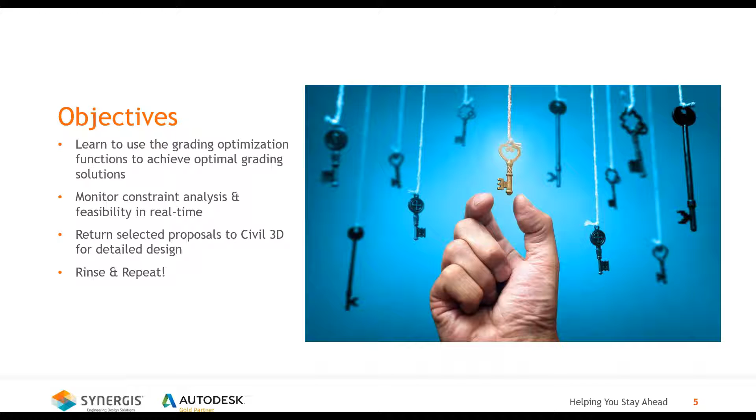So why are we doing this? Why are we creating this tool to speed up grading solutions? So that leads me to our challenges. It's time consuming. It's a manual process for sure. Requires individual thought in each little interaction, whether it's a driveway access, parking lot, detention basin, things we've all done 100 times. But there's only so much that we can automate inside of Civil 3D with our current tool set, which is just feature lines and grading objects, ultimately building a surface.

So when design requirements change, because they will, those revisions sometimes lead to starting over simply because the framework or how we set out initially doesn't really support those design changes. And ultimately what we're trying to do is save money for our client, right? So we've got this great design, but now we've got to bring in 10,000 trucks, and that's not really helpful, right? We're going to try to keep the dirt on site as much as possible and use everything we have at our disposal. So that leads us to questions.

What if you could reduce the time it takes to get that grading solution? What if you could generate options? What if you could use that solution directly in Civil 3D? And ultimately, those solutions can be balanced as a byproduct of the iterations. So what if we could do all those things? So loosely speaking, the answer to those what ifs is something called generative design. The idea is we take some input, feed it to a computer, and the computer outputs options, different solutions.

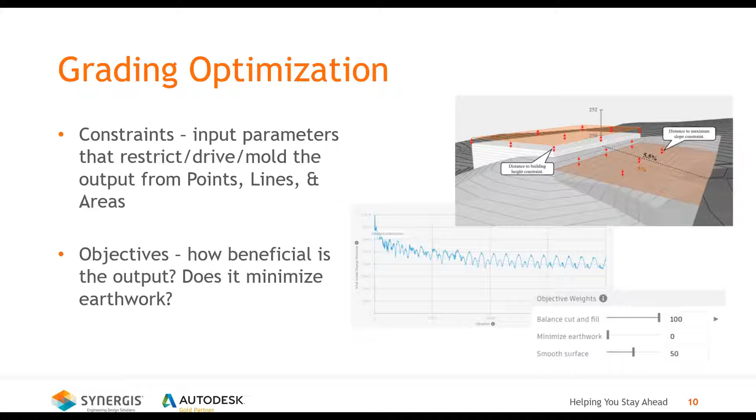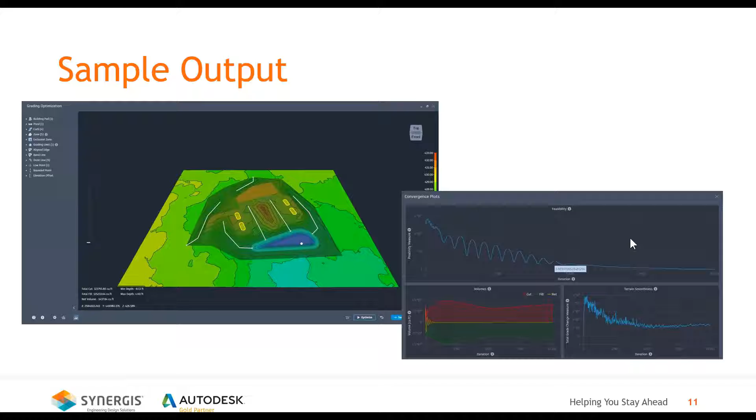Now, in my case, this approaches 0 or 1, right? So that's making it feasible. In other instances, we'll see this oscillate and it won't approach 0, it'll approach some higher number. And in those cases, we've got to adjust some of our input parameters in order to make things more feasible. And then ultimately, we're going to push this back into Civil 3D. That's the easy part. All right, so let's get into it.

So here I have Civil 3D. I've got a surface. I've got a background image just to kind of show where I am. So I've got this field. It's kind of undeveloped. It's used for agriculture right now. So why not put an office building there? That's what we do, right?

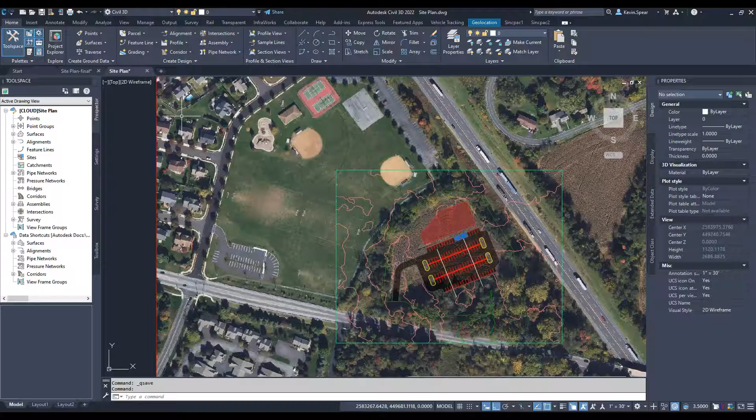A main road here. Lots of stuff going on in the neighborhood. Good spot for an office building, right? If I lived over here, that'd be a great place to have an office, right? I could just walk to it. So simple layout here, probably more parking than I need for a building, right? That's pretty common in standards.

But all I have here to start, I've just got some hatches. I've got a polyline that's closed. Right, I've got some blocks here showing the parking. Just your basic 2D layout, nothing super fancy there. Right, I've got my ADA spaces there in front of the building. Your basic site plan, right?

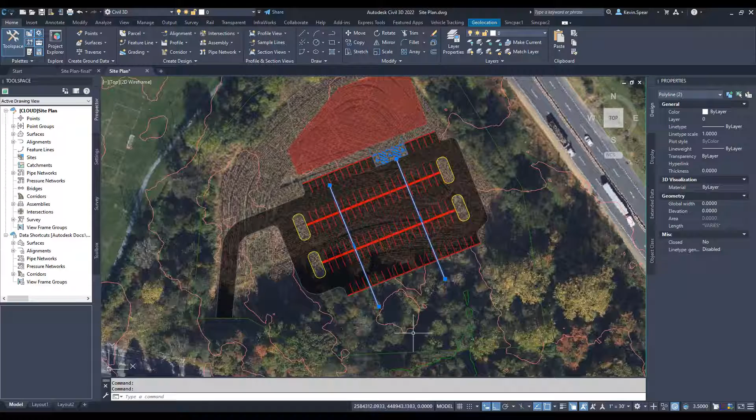The only thing that's probably slightly different than normal is I've got a couple of lines here that represent, I'll call them gutter lines. Basically the swales in the parking lot. I'm going to end up with a basin down here. This is the low part of my site. And I've also got a couple of closed polylines that represent the limit of where I want to grade. I don't want to grade the entire site.

Got some nice trees in here. I might even decide to pull this in if I can make the basin smaller based on whatever my needs are for volume. Right, there's some nice looking trees over there. So I'll start here.

To do the process, first I should mention where the tool is located in the interface. So in the ribbon on the Analyze tab, we have a grading optimization panel. That panel is not there by default when you install Civil 3D. It's actually an add-on.

I wouldn't even call it an add-on. It's an add-on in the sense that Hydraflow Hydrographs is an add-on, or Storm Sewers, right? Those are external programs we just happen to launch from inside of Civil 3D. And these are just simply the buttons to do that process.

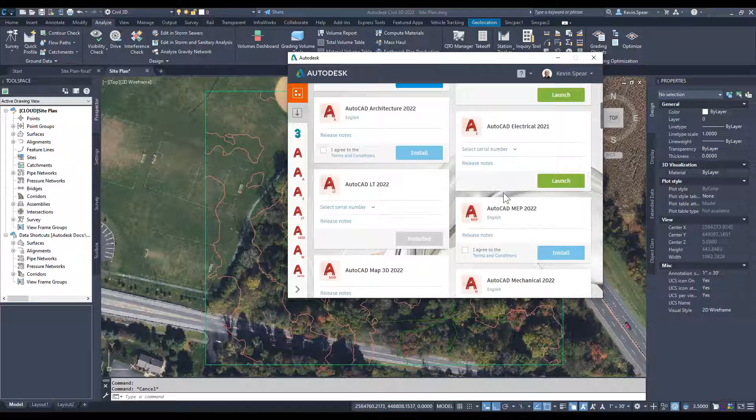So where do we find it? You can find it in your desktop app, right? So I've already got mine installed. So I come here to my products. I scroll down, and one of these will say grading optimization, if I can find it in 2 seconds or less. There it is. Oh, look at that. There's a brand new update. I'll talk about that. Obviously, I don't have time to update it right now. So that's where it will show up.

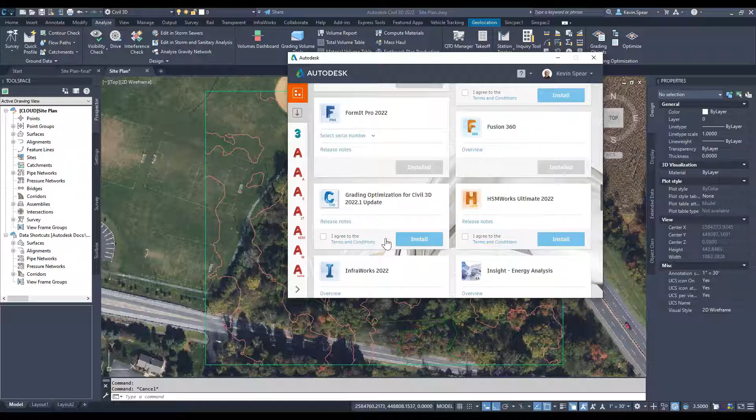If it doesn't show up, there are 2 things that could be the culprit. One, you don't have the AEC collection, right? It's only included with the license of the collection. If you just have Civil 3D, it's not included. The other thing is it has to be entitled like everything else. So your contract or software manager has to go into their Autodesk platform portal and give you access to the software. And then it'll also show up here. Right, so you click I agree and install, and off you go.

All right, so enough of how you get it. Once you've done that, this panel will then show up in the Analyze tab. So the first thing I'm going to do is click this Grading Objects button. What does that do? It opened up a couple of things actually all at once. One is an object browser. So this is very similar to our Toolspace here in Civil 3D, but because these things generally are living outside of the Civil 3D framework, we have our own browser for those objects. So as I create things, zones or drain lines, whatever it is, they'll show up under these different categories. So I'm going to minimize this Toolspace for 2 seconds.

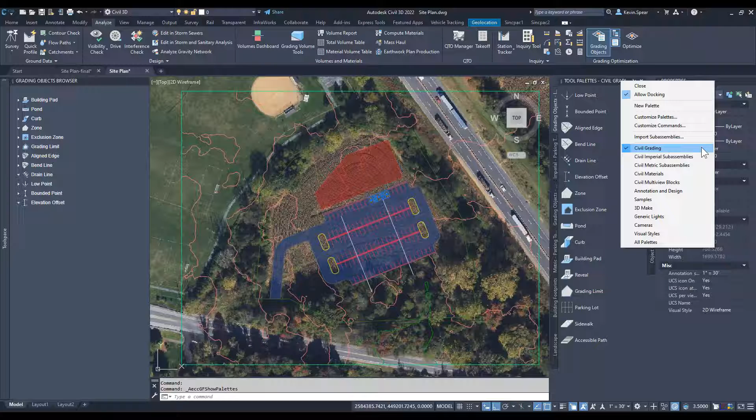The other thing that pops up is our tool palette. Now this tool palette is the standard tool palette, right? I've got all my Civil 3D tools, and I just happen to be looking at the Civil Grading tool palette group, which I'm pretty sure I created myself actually to put all these parking and landscape things in. But if you go to all palettes, then it'll also show up there too. So what's in here? These are specific tools. Now, what are we talking about?

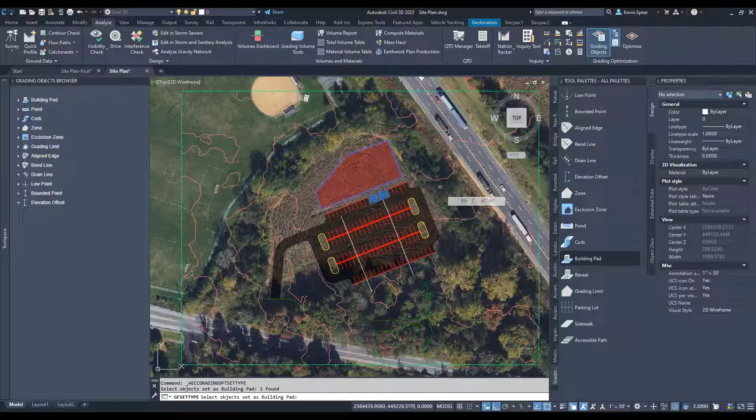So for instance, I've got this building polyline, right? So I've got a tool here to create a building pad. So I pick the tool. It says select the object to set as the building pad. So I'll pick my polyline there and then press enter. And then I get these properties. And you can see why it's helpful to have multiple screens here, right? And we'll call this building 101, whatever, it's a campus, right? You can have multiple buildings.

I can either give it a specific elevation at a fixed value or a range, or I can just say make it level. And as far as earthwork goes, we're on a slab and it's 18 inches thick. And then I've got a color for it. You'll see what that means here in a moment.

So there's my properties, and when I hit escape, it goes away, sort of like Quick Properties does in vanilla AutoCAD. If I select that polyline, even though AutoCAD thinks it's a polyline, the grading toolset now knows it as a building pad. And so you would go through that whole process defining all your things. Now, creating these 2D objects, that's same as always, right?

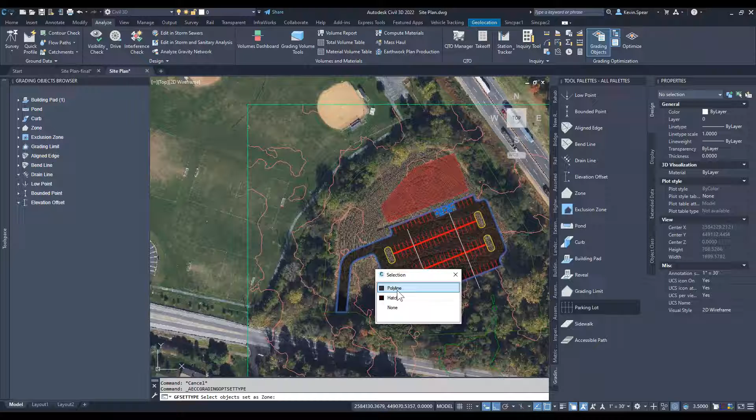So here's my parking lot. So I'll come here to parking lot, pick my closed polyline, and then press enter to finish the selection. And then there's my properties. Now this has got a few more toggles. That's interesting. Let me try that one more time. There it goes.

So we'll just call this parking. Naming conventions are always appropriate. This is a simple site, so it's not super difficult to name things. As far as the properties that go here, we have options here. And then depending on the option, there's an i. So if you don't know what something means, you simply click the i and it'll tell you.

So in this case, I might want to use the custom slope constraint option. So that allows me to manually change restrictions, constraints for a given zone. So in this case, my parking, maybe I'm okay with 8% down to 2%. I don't want anything too flat.

I've got some other options here for orientation and processing information. So I've got exclusive drainage checked here, for instance. That means the zone considers only drain elements that are inside the zone. Anything outside, it ignores. So drain lines, for instance, I'm only looking to shape this zone based on drain lines inside that area.

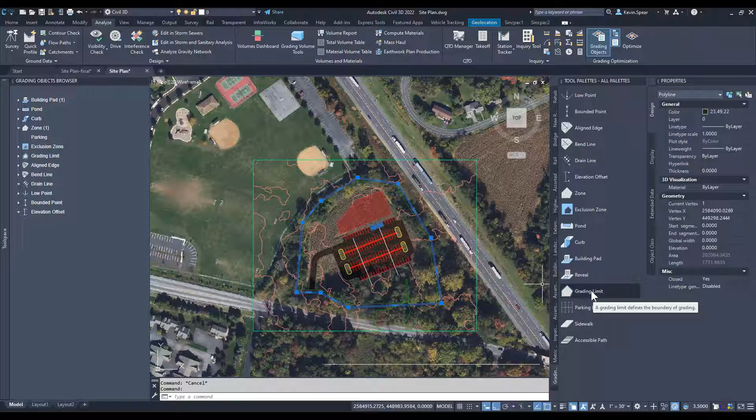The last thing I'll do is I'll use one of my outside lines to create what's called a grading limit. A grading limit is essentially our connection point to the existing grade. So I'll just call it limit. And I could use global constraints here for that. That's fine. And I don't care about aligning the surface or anything else, right? There's no depth of material. But I do want to check on this grading limit.

Now let me move this over for 2 seconds. Let's dock it. That will be better. Notice, of course, my building and my parking overlap the area of my grading limit. So how does it choose what to do? If I told this grading limit to be a certain slope restriction, I think I said 0.5% up to 3 to 1, versus my parking lot, which I generally want 2% to 8%, right, a little flatter.

What wins, and how does that get taken into consideration in these objectives, right? Because if I say minimize earthwork for the whole thing, but I don't for the parking lot, how does it decide who wins? We'll get to that in a moment, but that is important. Let me look at the rest of my properties here. Those are good for right now.

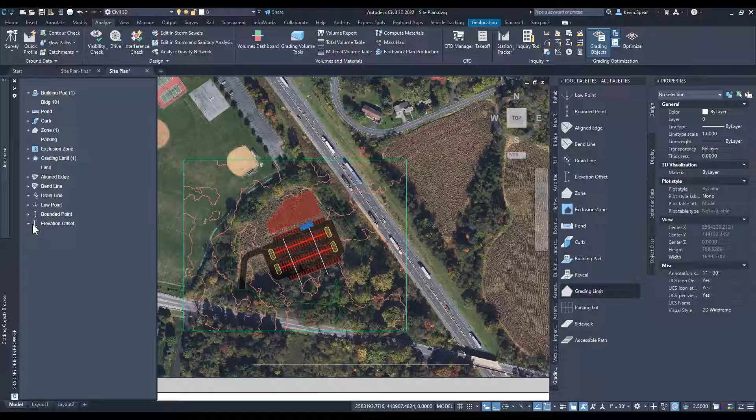And if I look now in my objects browser, I'll see my grading limit, my zone, and my building pad. And I can pick on them here in the browser, and that also brings up the properties. So very similar to what we would do in Toolspace, but it's its own browser. So I've got 3 things in there, nothing super fancy. I didn't even put in the curb islands just yet. We'll just leave them as edge of pavement.

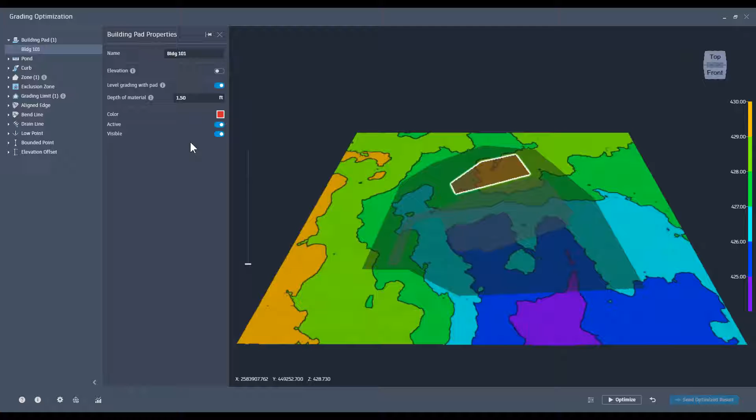So once we've got whatever constraints we want to apply, our last button here is to optimize. It's going to launch a grading optimization viewer. So now it's loading in the terrain and my tools that I established. Notice we have the same browser here for objects. And if I pick on something here, I get the same properties. I can change the properties here or back in Civil 3D, it doesn't matter. It's all the same data. Same thing for my zone, there's my zone properties.

There's a couple of additional tools here. As I hover over something, you'll see I get both a toggle and an eyeball. The toggle means process or not process. And the eyeball is simply just don't show it. So there's choices there for visibility and whether they're processed or not.

If I had additional zones, I can actually drag them up and down to reorder them. It's what we always wished could happen for point groups, right? If I need to order point groups in Civil 3D, I've got to go into the properties and then manually push up and down. Here, all I got to do is drag and drop. So as the site evolves, we'll see more zones, and then I can order them as I see fit. Now, what's the importance of the order? Anyone that's done a composite surface in Civil 3D is distinctly aware that the order is important.

Normally, we would start with a larger surface, and then all of our pieces stack on top of that. And ultimately, it sort of feels like a wedding cake. This is no different in the order of zones. So in the case of my grading limit and my parking lot, I want the parking to win. Now, the grading limit, when something is defined as a grading limit, that's automatically pushed to the bottom of the priority. It's the last thing considered.

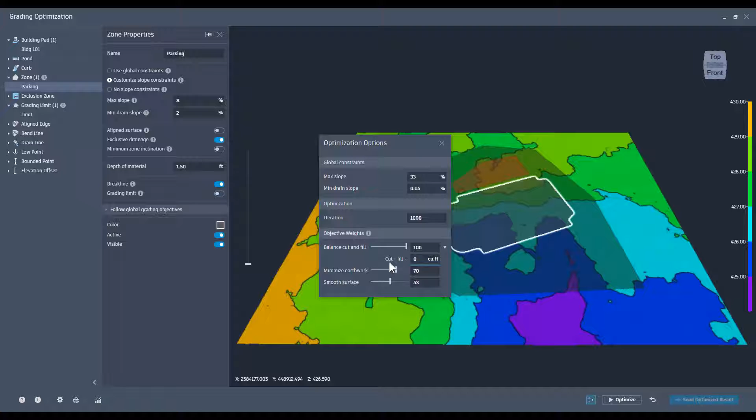If I needed to truck in dirt, I've got dirt from another site, then that would be a negative number. So that's all there is to it. And there's a little equation here to kind of help you remember that. I think Civil 3D grading objects is actually the inverse. It's fill minus cut. So if you want excess cut, it would be a negative number. Anyway, so how do we balance, right? We got a choice there. I'm going to set that back to 0, close this. And let's just go ahead and hit the optimize button.

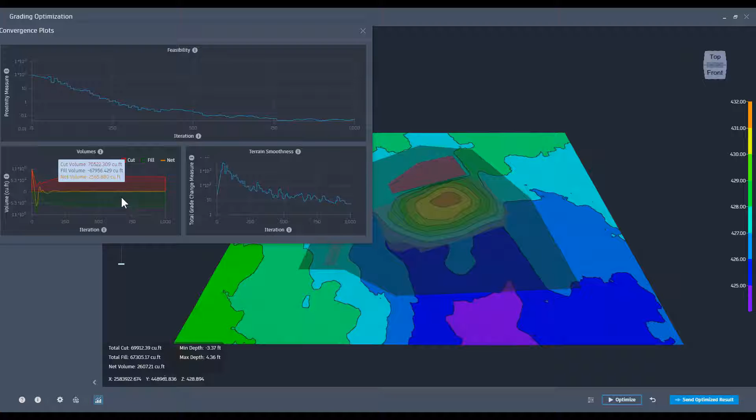We get some feedback here. What's happening? If I look down in this corner, here's those convergence plots that I was discussing, and it's on my other screen. Let me bring it across. So as things are progressing, you can see pretty feasible, but probably not a great solution given the number of iterations that I told it to do. And we can see some of these different plots. And as you hover over them, for a given iteration, I can see where it's approaching. So let's reset that. And let's bump the iteration up to 10,000 and see the difference.

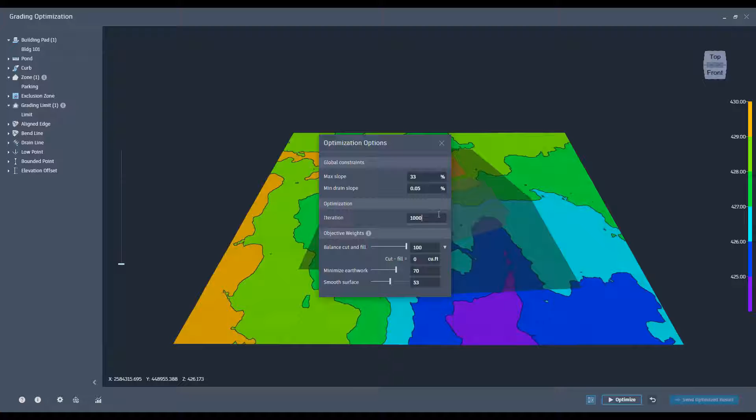Now I've only got, what, 3 items for it to think about. I don't have a basin in there. I don't have curbed islands. No drainage really of anything to really tell it what to do. So it's a very feasible solution, right? There's not a lot of complications to the scenario, but we'll change that, right? All right, so we're already pretty much at 0 at this point, so that's pretty feasible. So I'll just hit stop.

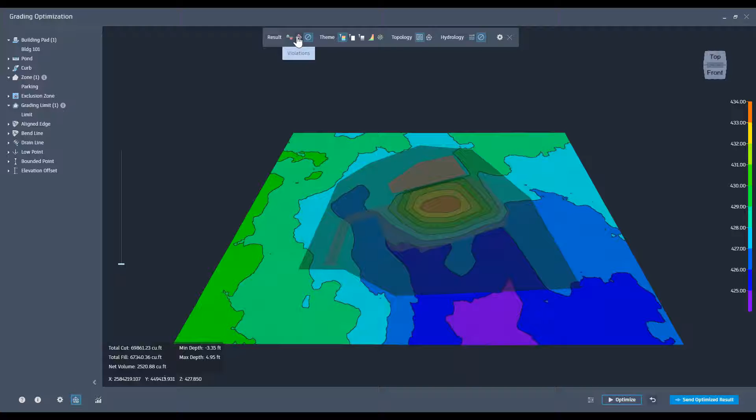And ultimately, what we might want to do is send this result. Oops, send that result right there. But before I do that, let me cover a few other things over here in the lower left corner. There's a visualization toolbar so that as this iteration is happening, you can define different themes. So currently I'm just doing an elevation theme, but maybe I want to see where all the cut and fill is. So basically I'm in a little extra cut at the moment. Right, so most of it's green, the buildings in cut.

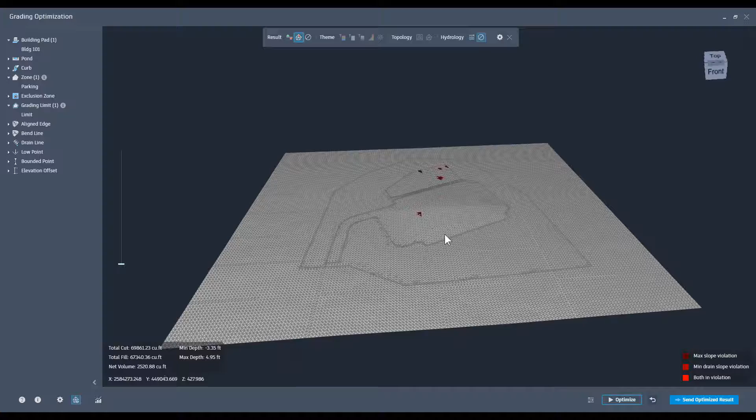I can also look at slope violations, and we're either looking at drainage or max or both. So not too many violations. In the building, we don't care because that's going to be flat, right? That's going to happen. So we have that ability.

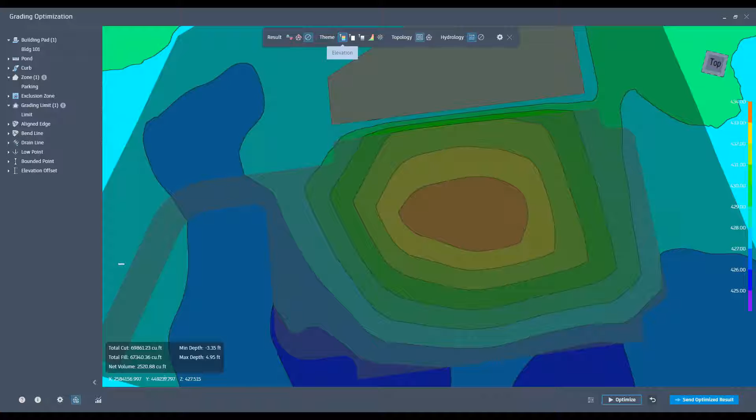The other thing that we can do is I'm currently showing contours, but I could show the mesh that's defining the surface. And I can also show direction vectors. Maybe. But since I don't have, I need something that defines drainage in the grading tool. That is defined by either a low point or a drain line. Those are our 2 primary tools for doing that. Neither of which I have, right? So it doesn't really know what it's trying to do for drainage.

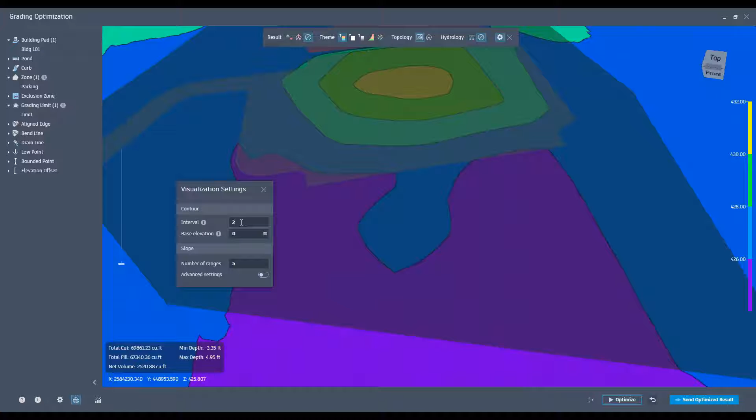The other thing I can do is I can set the interval for, in this case, elevations. So if I wanted half-foot contours, right, I could set that up. That's pretty easy. You know, 2-foot contours, whatever, right? Really easy to do that. And you can set your ranges for slope. So if I switch to the slope view, maybe I just want 2. And then I can define what those ranges are. And nothing super different there than what we would do with the surface in Civil 3D, but it's inside this visualization tool.

All right. So some of our visualization options. We also have preferences. So when we're defining our model, do we want to refine the surface? Well, that's kind of our goal. But if we don't, we can improve feasibility. Mesh quality. So in a conceptual stage, I would set this to low. But if I was trying to do like a final design, maybe medium was preliminary and high was final. But in this conceptual stage, low is fine.

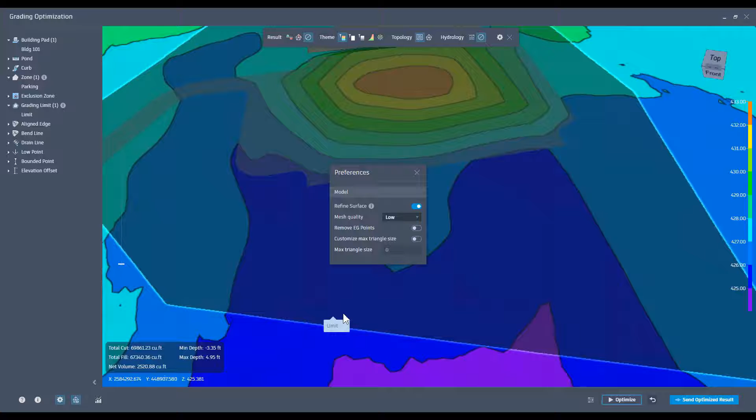Remove EG points and customize max triangle size. I kind of leave those off because inside the grading limit, it's doing its own thing and we don't have that much of an issue necessarily. So we have options, but I haven't seen a need to use them. So that's the interface in a nutshell. Ultimately, if this was our solution, we would hit send result. And we get 3 things that we can send into Civil 3D.

The surface that it built, which could be defined as a new surface in Civil 3D, give it a name and a style, or we could say update an existing surface. We can send feature lines, put them in a site, give them a style. And we can also send points. Now, no points are created because I have no drainage points, right? There's no directional aspect, if you will, to the surface, so it didn't create anything. But you don't have to send something. So you pick a surface, give a surface name, hit finish, and then ultimately that data would be in.

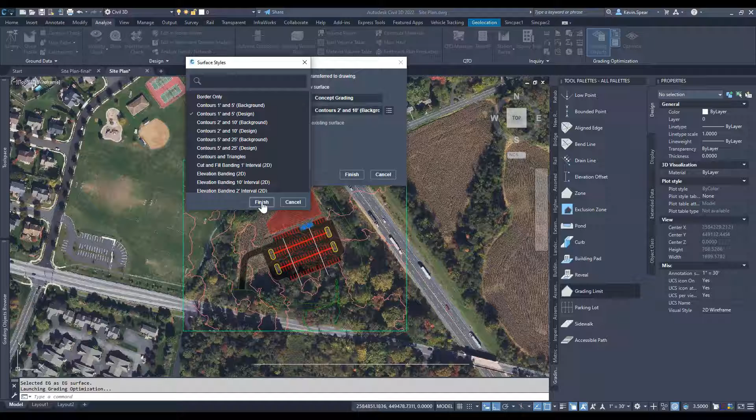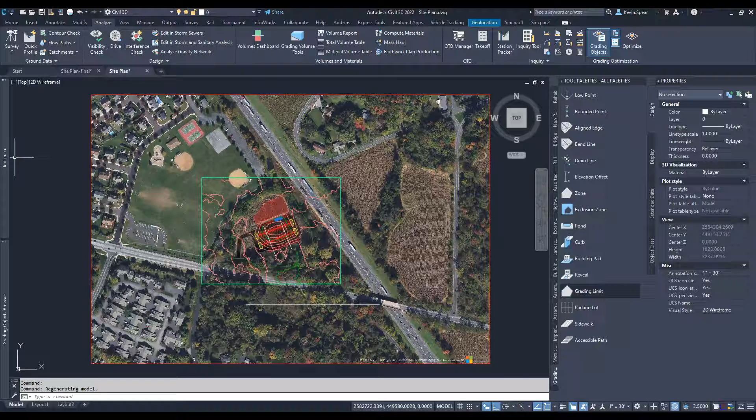So we'll say concept grading complete, with my spelling error. There we go. And we'll pick our style. We'll say 1 and 5 design, and then I'll finish. Now, when it brings in the surface, there are a couple of things. It's everything. So let's go back to our Toolspace and look at our surfaces. There's my concept grading. And actually, for 2 seconds, let me just do the border. Right, so it's literally the whole site. It included both my EG and my proposed surface.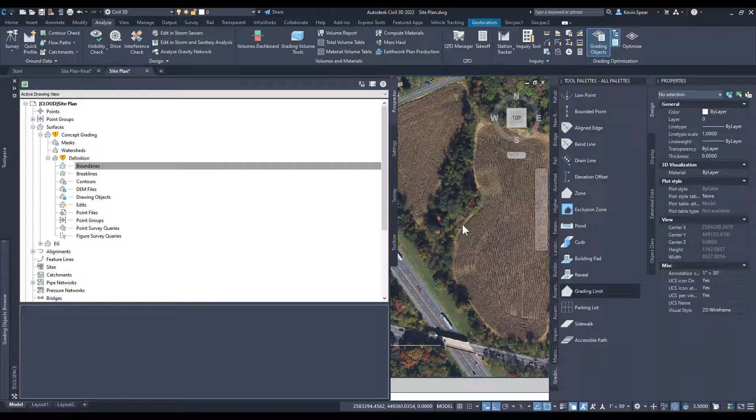So one of the things we typically have to do when we bring in a surface like that is add a boundary. Now, that grading limit can also be used as a boundary. So I'll simply add that. We'll say outer, and this will be outer, and we'll make it non-destructive, why not? And we're looking for, I think I used that one. Now my surface is there. And let's set the style to 1 and 5 design. And there's my design.

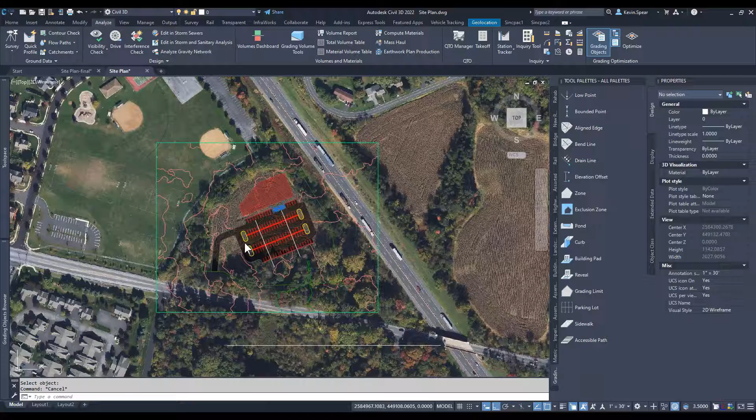Now, okay, so now I've got to add some curb, right? So here, let's just kind of further refine this a little bit. So we'll say this is a curb. Now, a curb can either be a closed polyline, or maybe this was all a line, right? Just the outer edge. I could do that as a curb, but I'm just going to do that piece, these 4 islands.

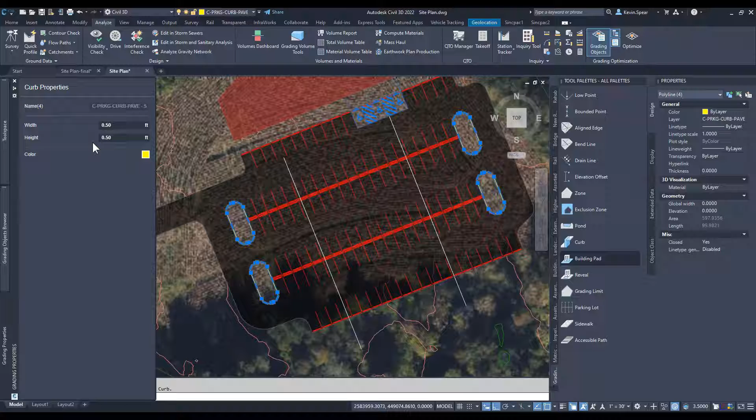Now this is your standard curb. It's not laid back or anything like that. Again, we're just trying to do basic grading design here. And also this is version 1. Ultimately, we'll have multiple shapes here soon. All right, so there's my curb. I got some new information.

Let's go back to the optimize. Select EG surface. Yep, I just use EG as my background again. Now, the reason it prompted me there is I now have 2 surfaces in my Civil 3D file. Before I only had 1, so it was obvious. So now I've got my 4 curbs. Right, let's go ahead and click optimize. Right, that's going to add a little more depth.

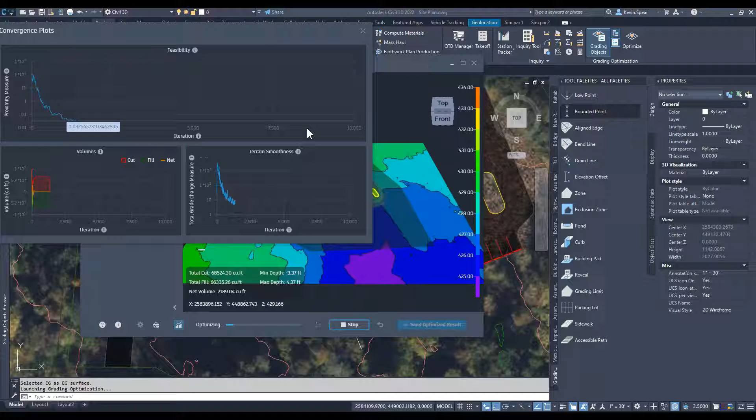And if we look at our plots, right, again, similar output, except we'll have curbed islands there. Well, let's just run for another few seconds or so. Man, that's going to 0 in a hurry. So a few things to impact. All right, so I'm just going to hit stop there. And there's my, we'll just assume that's a solution.

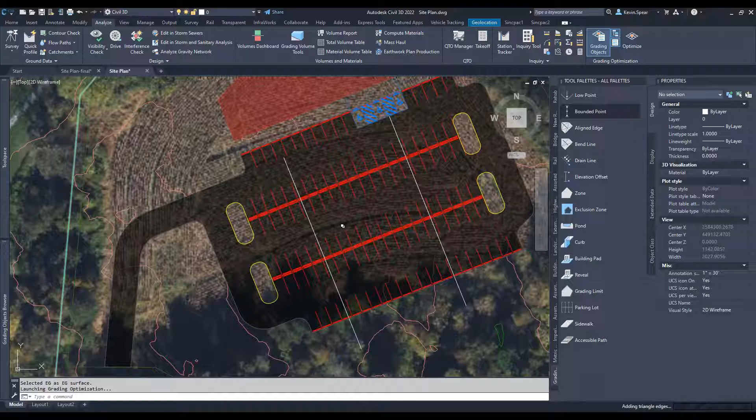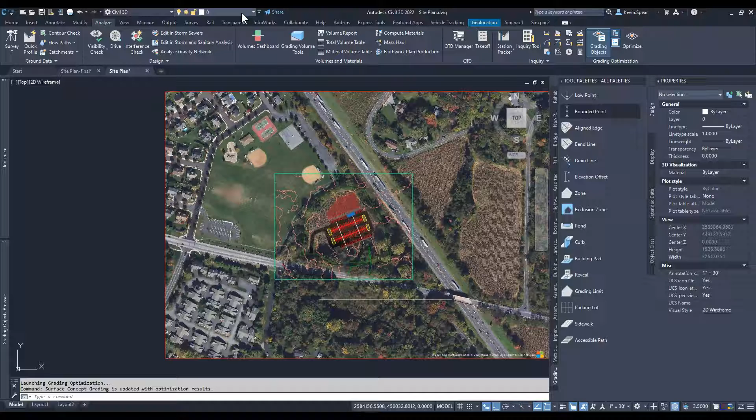Right, so I've made a revision. So for my surface, I'm not going to bring in my feature lines, but I do want to update an existing surface, concept grading, that's fine. We'll hit finish. And now that surface reflects those new changes. I thought I set the style. Oh, you know what? Here, let's freeze my image. It's a little tough to see. There we go.

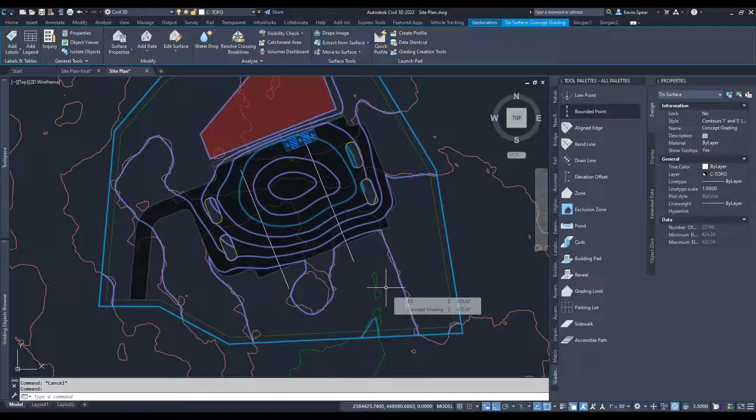So there is my surface right there. Kind of following the existing ground outside of my parking lot. I'd like to actually grade that a little better, of course. So that's where this additional polyline can come into play. My drain lines. So let me add a drain line. One thing to note about a drain line, when we create them, we have to draw them downstream, so high point to low point. So I've got a couple here. I'll draw one in a second.

So that would be drain line. I simply pick the object. It already knows the direction. I look at the properties. There's nothing but a name, that's pretty straightforward, and a color. So we'll do the same thing for the other side. Offset drain line. Pick the drain line. There we go. Now it's a drain line.

All right, so how do I create a drain line? Polyline, line. And let's say I wanted to make sure this area got to my basin down here. So I'm simply gonna turn off my ortho. And let's turn off the OSNAP too. So generally, you know, how I want to get water to the basin, wherever that basin might be. You know, something like that, right?

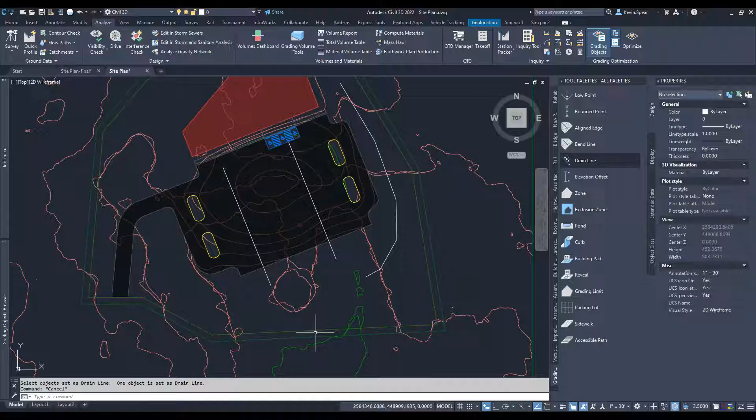Now when I create a drain line, I simply pick that polyline, and because I started at the north end and drew south, right, that's the direction of flow, I now have a drain line in that direction. That's as hard as it is. So this is all 2D stuff that we're starting with. Same thing, let's do the ADA stuff, right? So I just got a simple polyline around that.

So in that case, I would do accessible path. I can pick that polyline, and now I've got properties for that zone. So I might call this ADA parking, right? What's my max and min slope? Maybe I could go 0.5 if I was, you know, willing to do that.

Break lines, you know, do I care about balanced cut and fill? Not really. Do I care about moving dirt or not? Not really. But I do care about it being smooth. Okay, fine, fair enough. That's our ADA parking. So that's the process for all the different bits and pieces, whether it's a building pad, a reveal, a pond, right? They're all pretty much that same idea.

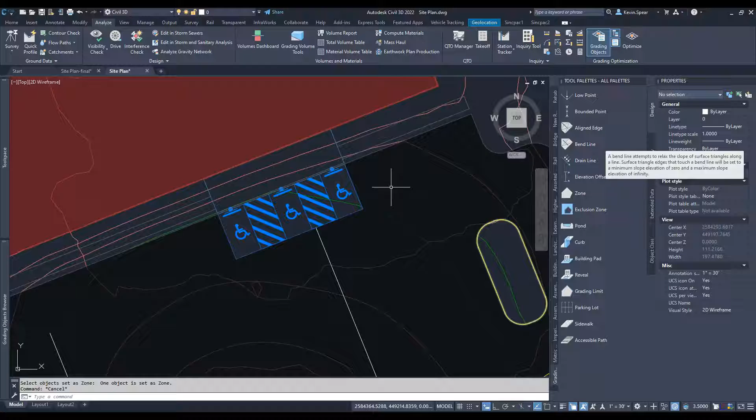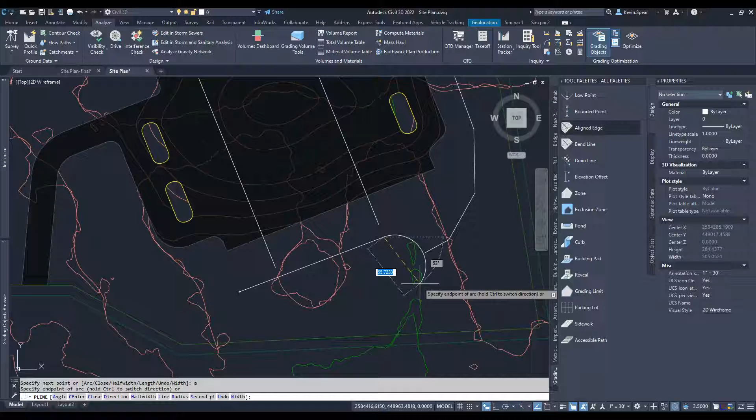Now, the one thing that needs something else besides a polyline is a low point grading object. This requires a COGO point. So let's fake in a basin for 2 seconds. So maybe something like this. We'll say a flat edge for most of it. Throw in an arc. Now let's be a little landscapey. And then we'll close it. Perfect. Exactly what I was thinking for basin, right?

So how do we create COGO points? Manual. And I'm just going to pick a point in the basin, and we'll call this low point. Doesn't need an elevation, so that's fine. There it is. Pretty straightforward COGO point.

Now when I get to my grading object, low point, select objects as low point. So I pick my COGO point. And look at my properties. Again, it's just a name, and off we go. That's my piece. So let's take a look and see what happens now. So we'll go back to Analyze, Optimize. Again, I need to know what's my parent base surface, EG. That's fine. And we'll hit Optimize.

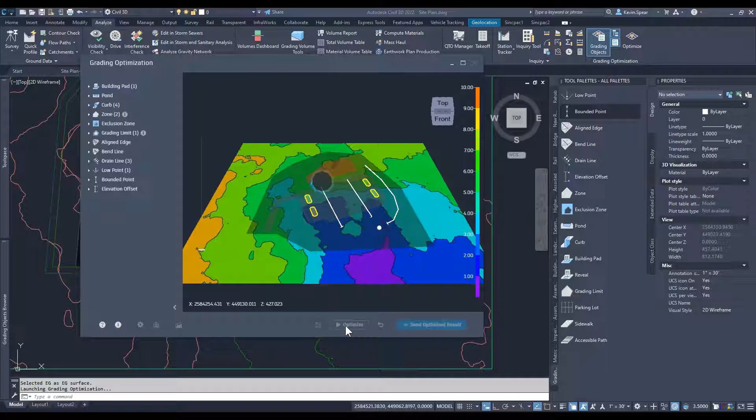So I've got a little bit more for it to think about. Let's take a look at our convergence. Again, not too bad because we don't have a whole lot driving stuff. That looks pretty good. But it is flattening out above 1. Oh, there we go. Got a nice little dip again. So it may take a few moments for it to figure out a solution.

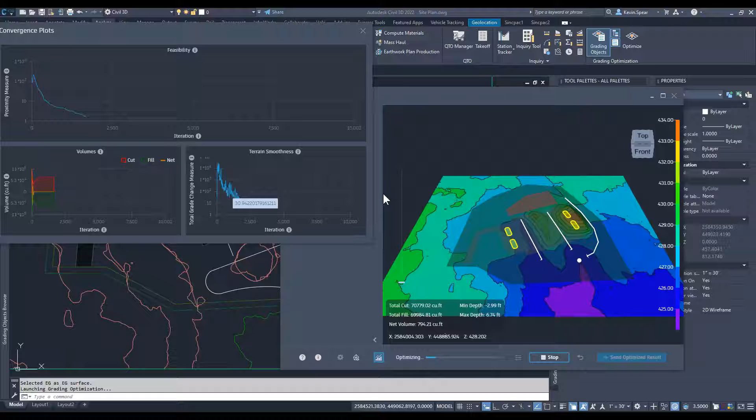Now, ultimately, if it does flatten out, we just need to change our constraints. Okay, so I'm just going to stop it there. And of course, ultimately, we would update our surface. Now, let me move forward in time a little bit. I've added a few more bits to the puzzle. So I've added a pond. Right, so I've got pond properties. So I can define my volume, my depth, basic aspects of a pond.

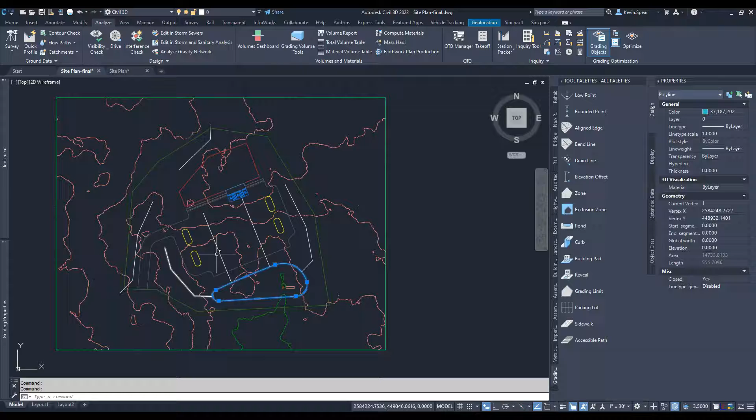I've got a couple more drainage lines here. I did add a sidewalk along the front here. And I did add another accessible path up to the building. I probably could have made it all one, but I wanted to kind of separate it from the parking lot. The other thing too here is I want these to touch or even overlap so that there is some thought of continuity.

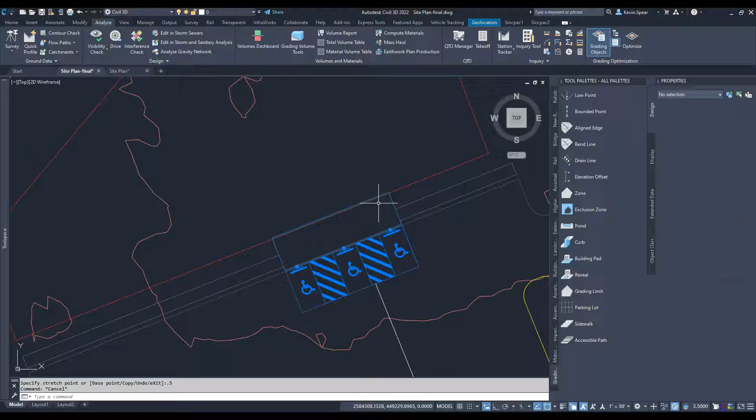So one thing I often like to do in this situation is use my object snap tracking. And so I'll just sit on that point. I wanted to move endpoint. There we go. Now I'm doing an extension of that line. Let's just say it was 0.5 feet into the building. There, so I've got a half a foot overlap. I think I'm good. So let's try that.

I also added, I think I added that as an internal. Oops. Yes, I did. So I've got two there. So let's go to the optimize tool. And let's take a look at some of the ordering now that I've got a bunch of things in here. So a few more things here to calculate, if you will. So I've got 5 zones.

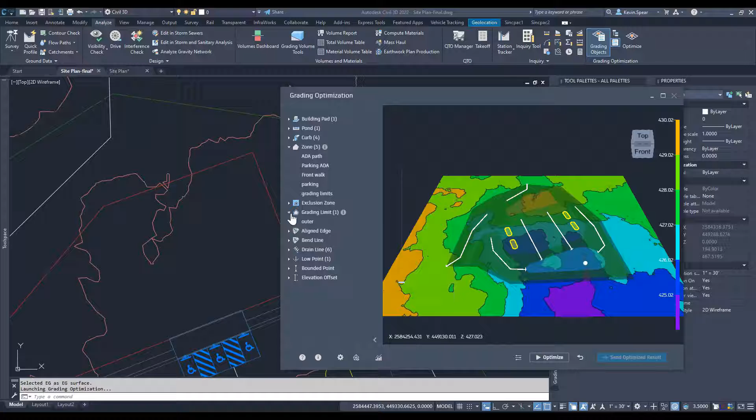So this grading limits is this internal line, right? So I put that at the bottom, then my parking and then the front walk. Things that are adjacent aren't necessarily critical as to sequence, but things that do overlap, we do have a preference. What else? So there's my grading limit, set to outer. Notice everything is turned on and visible. There's my curb. There's my pond and my pad, my drain lines and my low point.

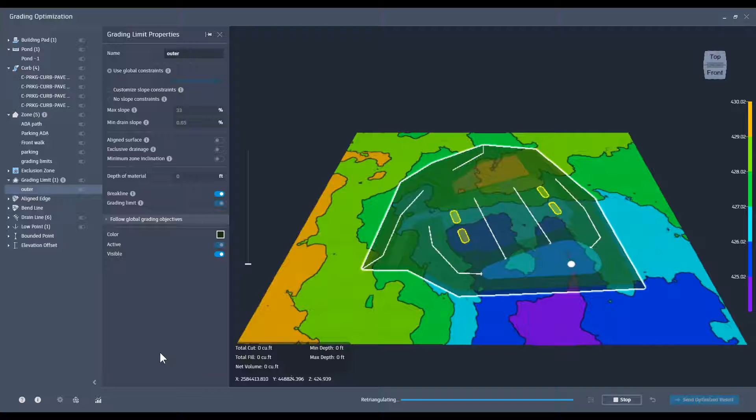So let's take a look, see what happens. We'll go ahead and optimize. And let's take a look at our convergence plots. Now, while this is doing it, how do we navigate? Because you might want to look at this from a different angle. So right now, just clicking and dragging, and that's sort of an orbit, if you will.

If I scroll the wheel, of course, that's zoom. Those are our two main things. If I hold the wheel, I can zoom in and out as well. So that's the same thing as scroll. If I hold shift and left click, that's pan. So our basic tool set, it's very similar to InfraWorks for those that have used that.

Now you can see I've got a little bit of noise there up front. So as it starts to vacillate on some different constraints, it's starting to figure things out here, and the feasibility curve starts to get, shall we say, a little smoother. And of course, it'll go up and down. And it's taking a little longer because there's more things to think about. And I think I put the iterations up at 10,000. There we go.

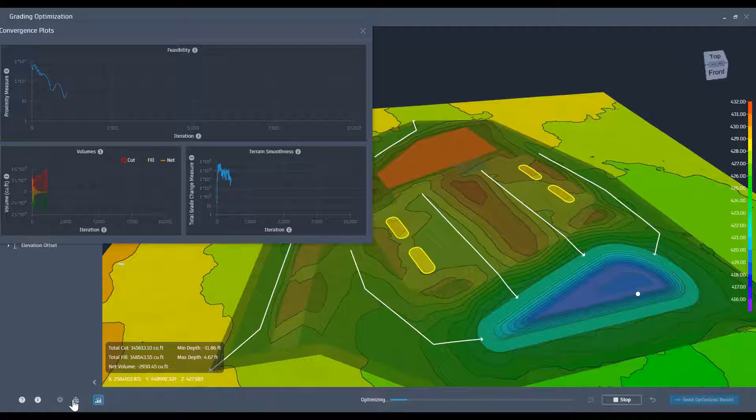So currently I'm at excess cut, which is fine. No, excess fill. Right, so cut minus fill gives me a negative net value. There we go. All right, so a little cleaner there on my convergence. What else can I do? So now that we're looking at this thing in motion, what if I go to the violations?

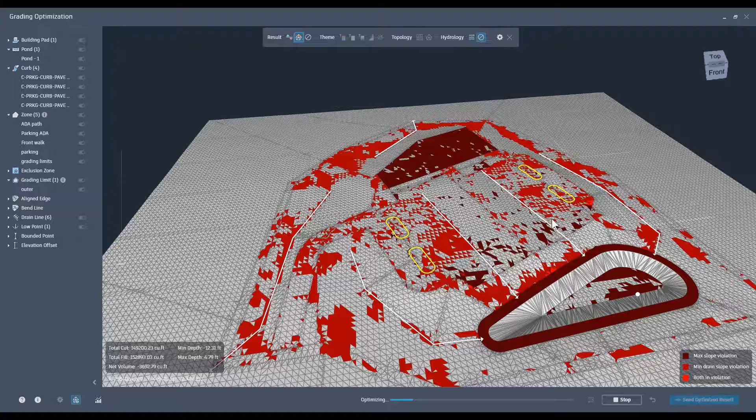So for each TIN face, it's calculating or responding to those constraints. Does this face meet those constraints or not? Right, so we've got different constraints, maximum or minimum. Now, in some areas we may care, some areas we may not.

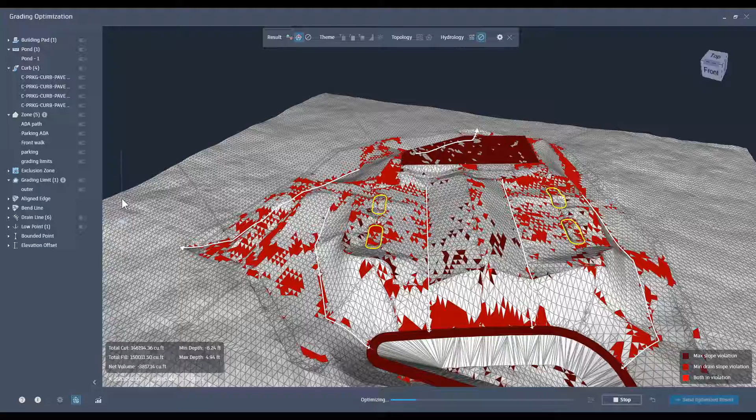There's a slider here to exaggerate what's happening. So if you're in a flat area, right, we can kind of see things a little easier. With no exaggeration, it's kind of tough to see what's going on in this site. But here we can kind of see how things are shaping up. And again, this is early in the process, right?

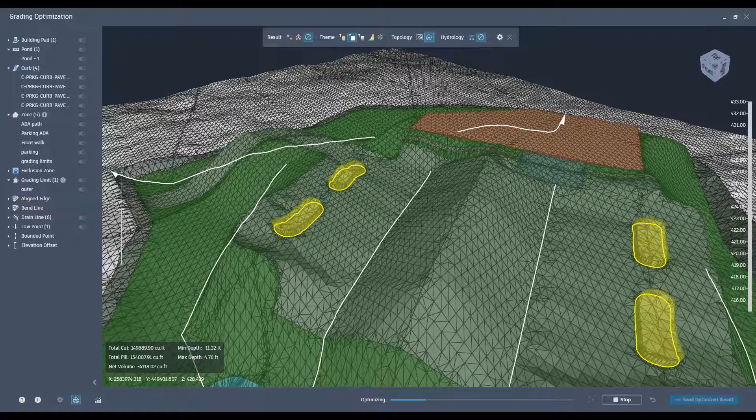There's my pretty little curbed islands. What else can we do here? So let's take a look at our wireframe, right? That's what we were just showing with the violations. What about our hydrology? So now we get to see some of our directional flow, if you will.

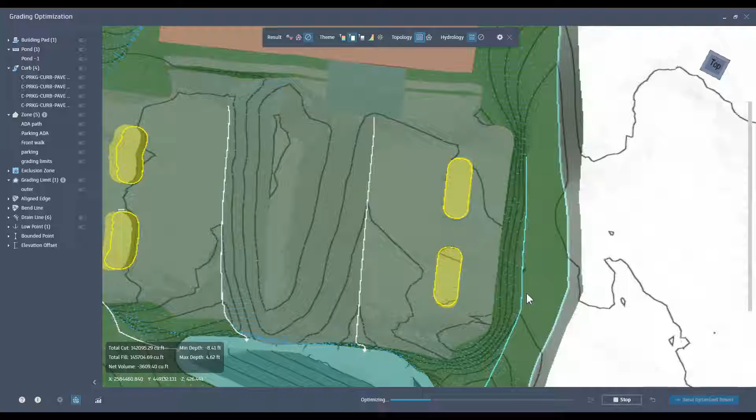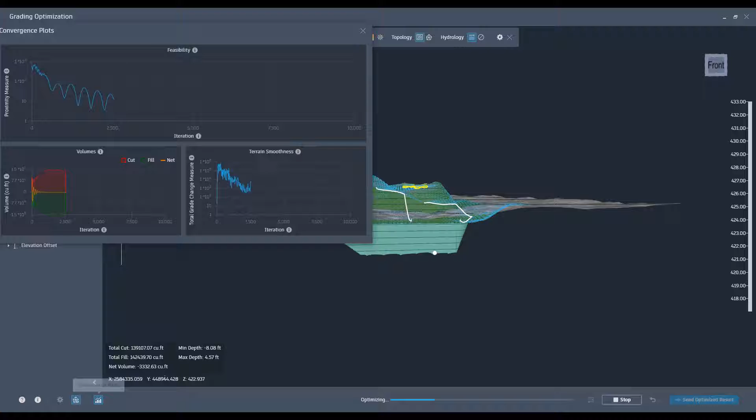It's kind of cool sometimes to take a look at a side view to watch things iterate. So one of the things that happens in the convergence plot is, let's see if I can find a spot to show all this at the same time. There we go. Right, as this oscillates, it becomes more feasible. You may see certain areas go up and certain areas go down and vice versa, right, when we get to the bottom of this. Now, ultimately, because I've run this a few times, it does become feasible. It just takes a little while.

So in lieu of that, let me check my PowerPoint here and see where we're at. So that's where we left off our demo, right? So let's review some of the quick tips while I was processing. Constraints and objectives are two pieces to the puzzle. Constraints win over objectives. We're always trying to meet constraints, sometimes in spite of objectives. So the solver is trying to pick which one wins, so constraints will always win.

Objectives, if we set them to 0, as I mentioned before, basically it just becomes a feasibility study, right? We're not worried about cut and fill or anything else. And ultimately, proximity to 0 in that feasibility graph means that's a feasible solution. If it doesn't approach 0, if it stays at a higher number, then that's probably an unfeasible solution. You saw that I didn't get great results without drain elements, right? So putting drain lines in or low points are going to help us out. Our grading limit is our daylight line, our connection to the EG.

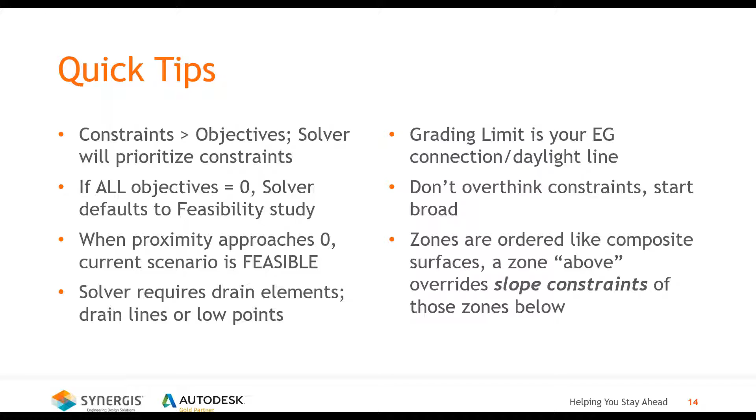so we can give the algorithm somewhere to go. And then ultimately, as you iterate, I think I did 10 iterations in the span of like a half an hour yesterday, playing around with some options. So it's not like it takes a great deal of time. And then the last is when we have zones that overlap, it kind of feels and functions like a composite surface. So we want to order those important zones above ones that are less important so that those slope constraints would then win.

All right, so let me jump over to our questions. I see a few questions here. So the first question I see says, where is the optimizer getting surface data from? That's a good question. So let me jump back into this. So you can see that that's oscillating. Can I switch to Civil 3D? Nope, I cannot. Oh, wait, no, it's not holding it hostage.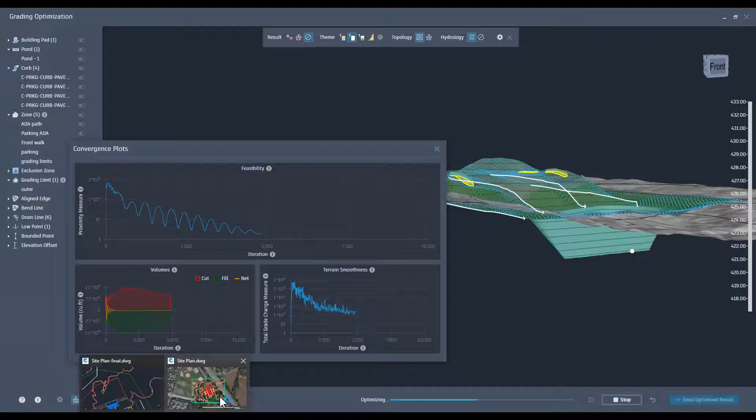So in my site plan final, I have one surface at the moment, just an EG. I didn't actually bring the data back in. So if there's only one surface, that's the surface it's using to start the context for all the different pieces. If I switch to my starting point, in that case I brought in that concept, right? The next time I went into the optimizer, it's like, which one's my base surface? And then that's when I had to tell it to use the EG.

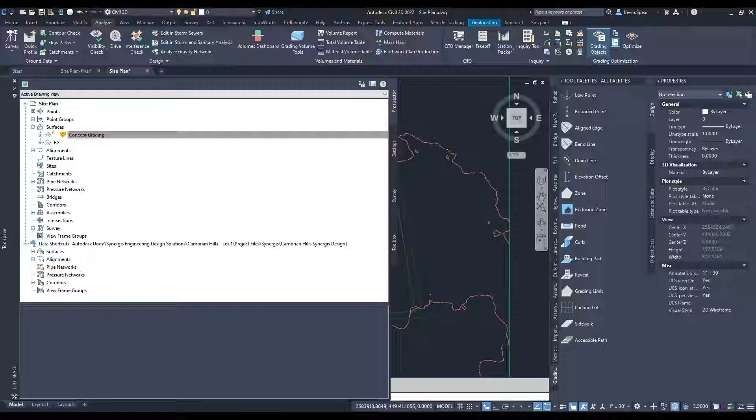It says, can you define the multiple surfaces? So the optimizer is looking for an FG only. Some of the depths and different things that we're giving it in the parameters of the constraints is simply to help the objectives, whether it's cut fill or moving earth or, I forget what the other one was, feasibility, right? Is it possible?

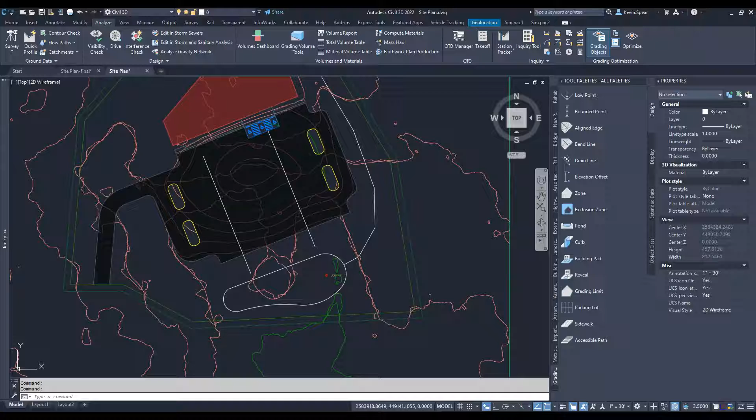Smoothness, right? So we're looking at those objectives. So I can't really get a datum surface out of the parking lot, if that's what you're asking. However, when I do send the results, I can send the feature lines, and then I can build a datum surface out of those feature lines and do it that way. But the optimizer itself only builds the final grade.

So those two questions were from Brian. Oh, and this third one is also from Brian. His question is, do we need advanced hardware to complete these iterations, or will the typical CAD workstation manage this? So that's a great question.

My computer at the moment is 5 years old. It is a Dell Precision laptop. It's kind of middle of the road then, and I would say it's pretty standard spec for Civil 3D. So I've got 32 gigs of RAM. I've got an SSD hard drive. And I've got a secondary hard drive, but it's just for data. Actually, this data is, that's a different process, I guess. It's working off my internal SSD drive. So that could be impacting.

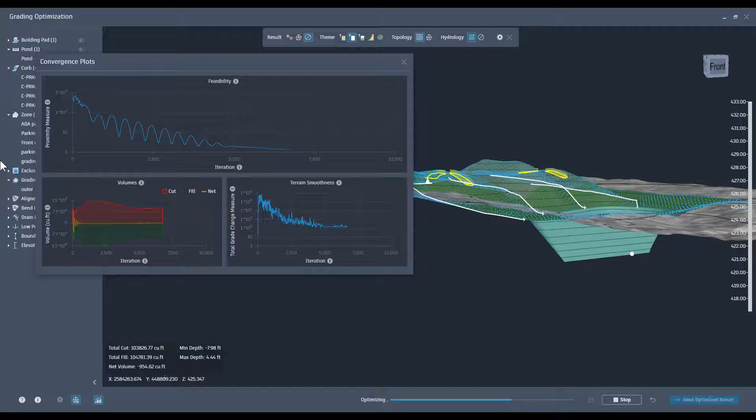But the process, that's actually a good question here. Let's take a look at our task manager, right? What the heck is happening in our performance? So the CPU is going to go crazy there, right? That's expected, but nothing that it can't handle. Memory, that's pretty standard too. It's not really peaking out. That seems fine. It doesn't seem to be hitting either hard drive. So from a hardware perspective, your basic CAD machine is going to work fine, it looks like. That's a great question.

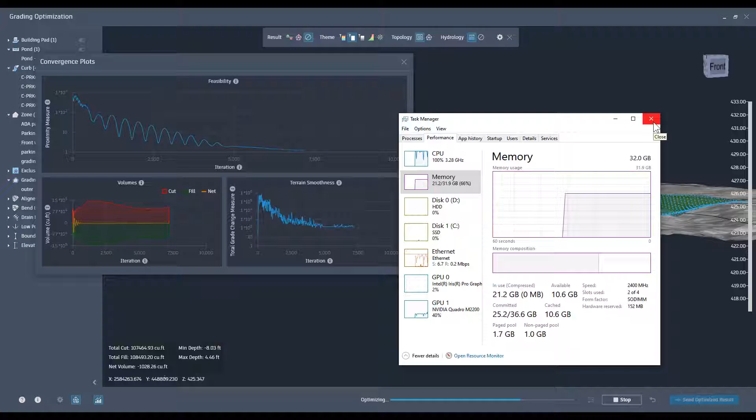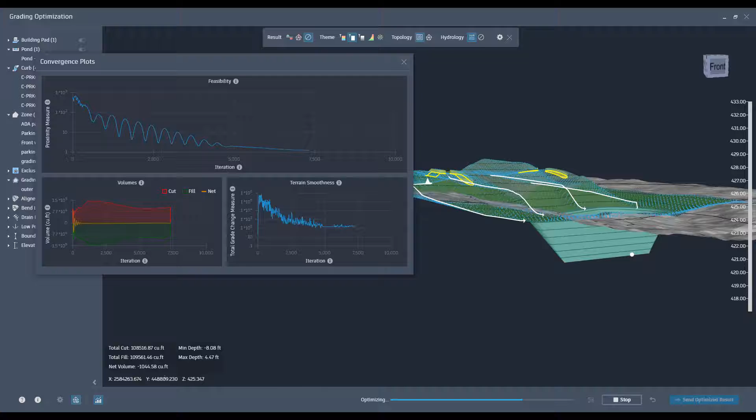Any other questions out there in the audience? Let's see. All right. Not seeing any other questions.

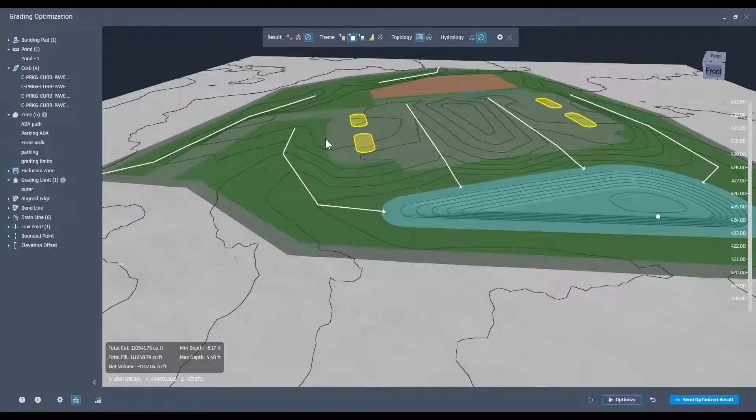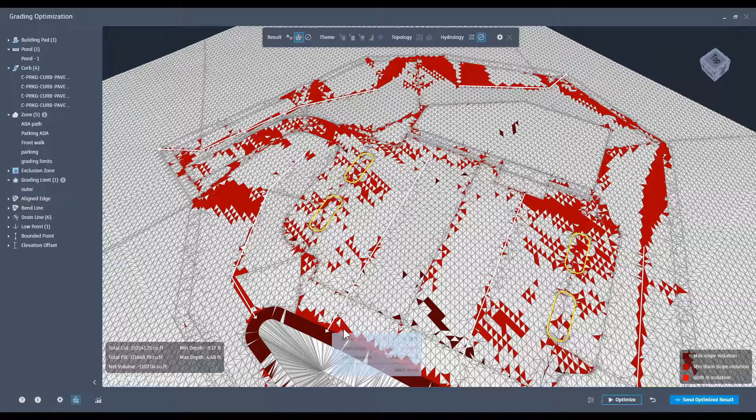How can we check slopes? Actually, we can go to the violations and hover over a given face, and it's going to tell me what's happening. So we're roughly 10%. So that's 10 to 1, right? So not too steep in there. Where are we at in front of the basin? 5%. That's not too bad. Looks pretty good. So I'm going to go ahead and bring this back to Civil 3D.

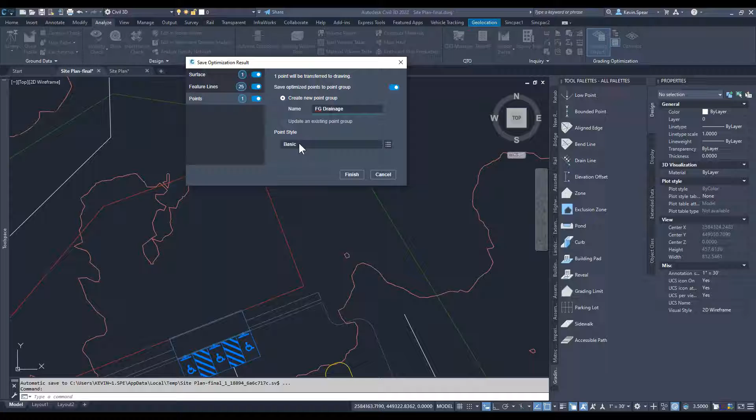And so there's my drain point, and I'll bring it all in. That's fine. We'll say final. Oops. How long have I been typing? Way too long. Yeah, it's always a challenge. All right, so there's my surface. Feature lines, I'll put them in FG control, I'll call it. Basic, that's fine. And a point, we'll say FG drainage for a point group, and that's fine for style. Okay, perfect.

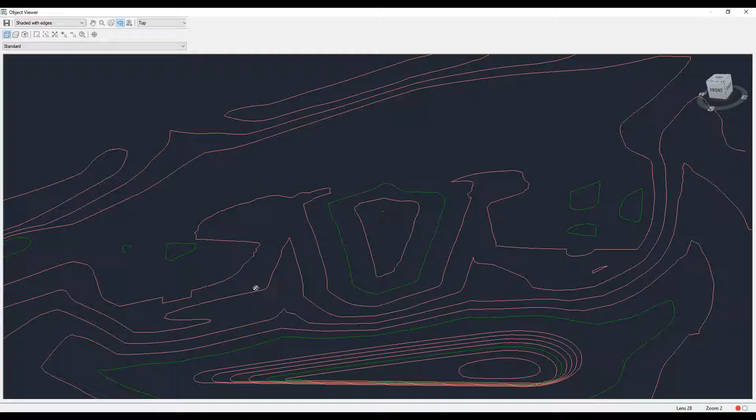All right, so we'll do one more thing there. We'll go into that final and then add a boundary, just like I did before, called outer, non-destructive, pick my line. There we go. So there's my contours, there's my surface. Let's take a look at this in the viewer. Right, not too bad. Looks pretty good. It's got a few rough spots. I might want to tweak some of that, but all things considered, that's not too bad for 20 minutes worth of time yesterday afternoon. It took me longer to actually lay out the 2D stuff than to do the grading optimization, ironically.

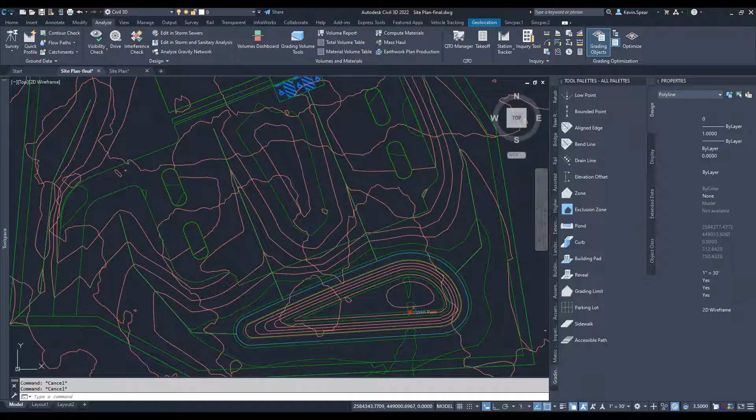And of course, at that point, you could do your volumes. Off you go, do all your normal Civil 3D stuff. Now, if you don't like some of how it worked, all these green lines, of course, are the feature lines that we brought in. So maybe you like the parking, but maybe you don't like this berm ledge, whatever, right? Simply build a surface without it, and off you go. But you get all those tools. Like if you don't like how this put a high point on that feature line, right? Maybe we pick and choose how to change that. So now we have the actual tools. We can get really finite with it.

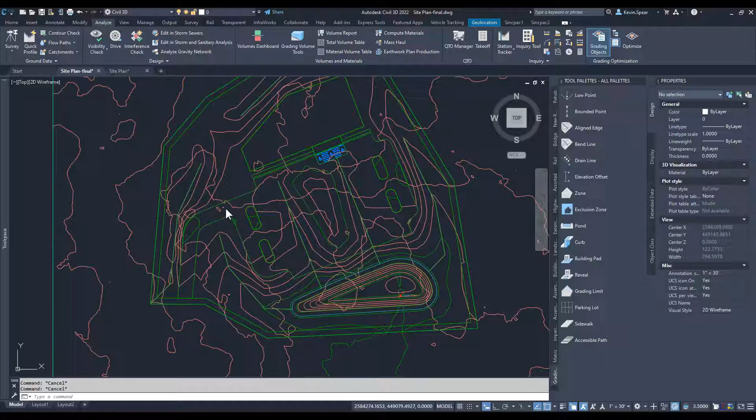Any last questions here?